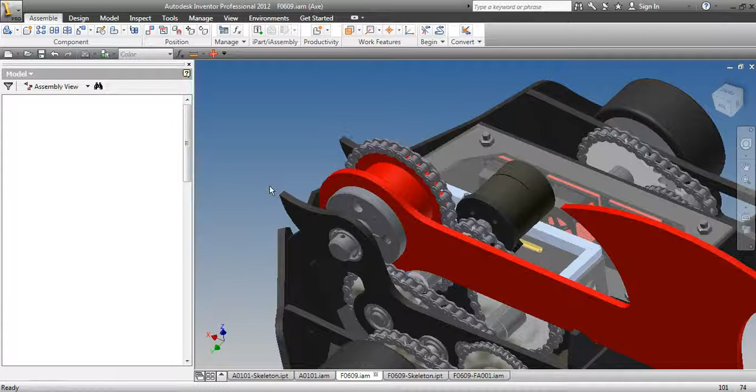I've managed to remove those bottom axles and bottom bearings. Well, I haven't removed them, I've suppressed them, so they're still in the axe, still there in the axes and knives and things. But in the first spinning weapon I'm going to draw up here, they've been suppressed.

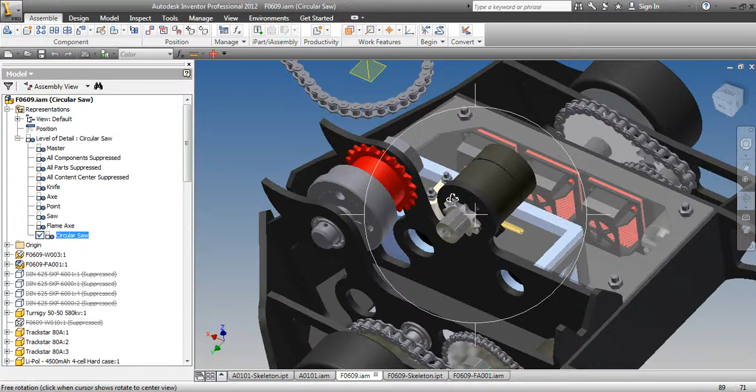I've also put a 20 tooth sprocket on there instead of a 30 tooth, so it's got a smaller sprocket, and we've got a 10 tooth on the weapon. I'm just trying to decide if I should make it 8 or 10 or whatever.

It's not going to be an extremely fast spinning weapon since I'm only going to run it on 4 cells. But I also want a bit of torque in there because I want to put the swing hammer on, and the swing hammer would require more torque rather than speed.

But we'll just leave it for the moment because I need to put the chain on there and make sure the chain distances are correct. I've set up this chain, so I just need to modify it. If I just open it... come on, open. Yeah, open the chain model. You edit the spreadsheet.

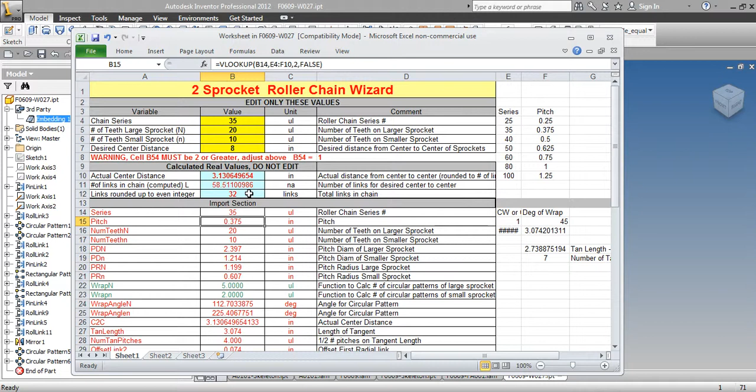I have a rough estimate of how far I want between the two sprockets - I've got a 20 tooth and a 10 tooth. It's saying at the moment it's around 3.9 inches. I want it to be about 3 inches, so we'll try 34... no, 32, that's a bit closer. Yeah, we'll leave it 32 teeth - 32 links, what am I saying tooth for - 32 links of chain. We'll save that.

Update that. There we go, that's what the chain would look like. Remember the part number, weapon part 27.

So now I need to change it so the distance between the weapon and the motor are now the same length as that. So if we go to the skeleton, drive in the chain - where are you, chain, number 27 - here we go, center to center distance, there it is, okay, nope, what's the center to centers, which one is it, where's 27... one, two, okay.

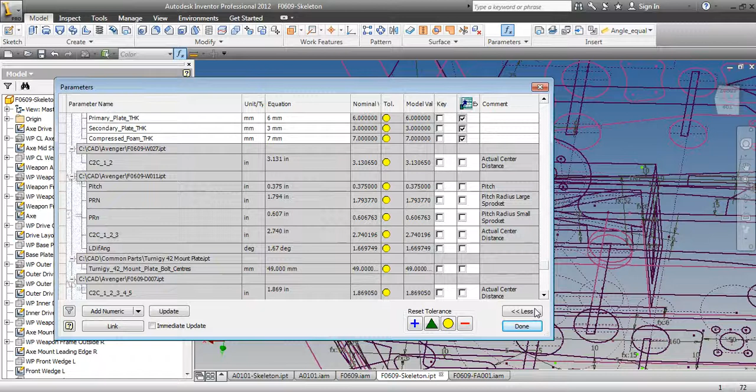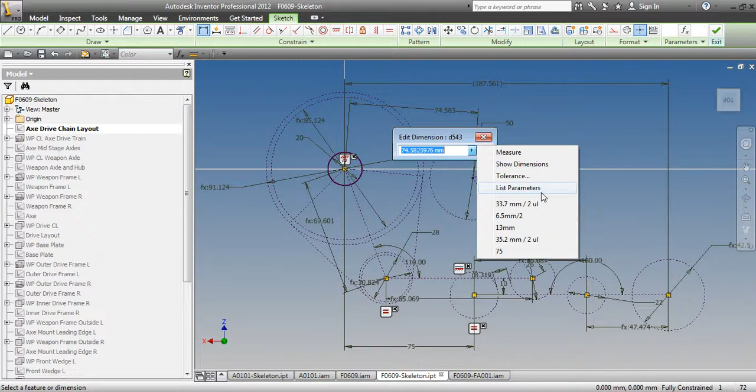So if I go back to the main layout, delete the angle for what the motor's sitting at, put in a dimension between it - the center of the weapon axle, the center of the motor, aligned - select the C2C_1_2 parameter, here it is.

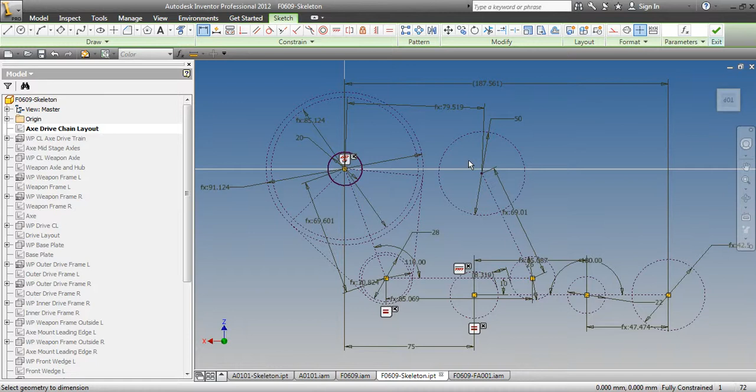So now the motor sits the correct distance for the gear reduction - for the axes, a 3-stage gear reduction, and single stage for the spinner. That way I can remove sprockets and add sprockets back in to change gear reductions. So, goody.

Just save that, back to the main model, update it. Motor moves a little bit. So now we're just constraining this chain.

The chain is on the center line of the weapon sprocket. So where's the center plane of the weapon sprocket? I don't know, I'm looking at the right part, just can't see it. We'll go wireframe so I can see it. There we go, that one. So it's on the center line of that plane and that plane. There we go, apply, done. Turn it back on to shaded.

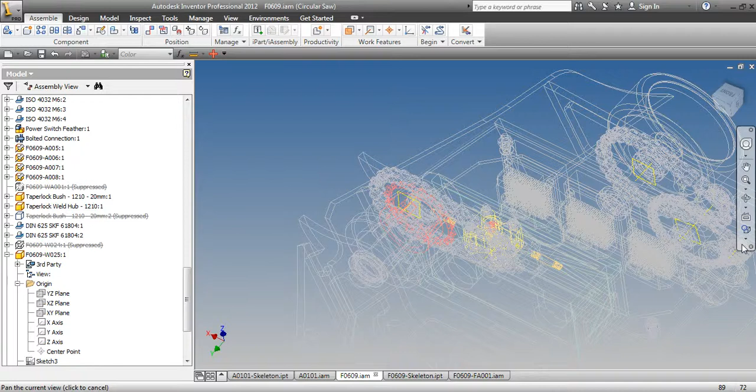Geez, my mouse is really messing me up at the moment. Oh, center line of that axle, center line of motor, and there's the center, I want that. Really need to pull my mouse apart and clean it. And the center line of that and the center line of that. There we go, happy.

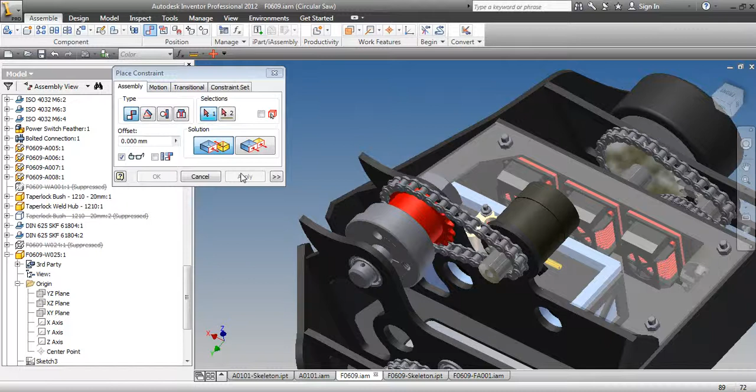So that's the weapon drive for a spinner - if we use the same robot to drive a spinner, that's what it would look like. Now we just need to draw a disc.

Although I need to open up the front a bit more, but I want to see where the disc sits first and how big a disc we can have. So I'll just quickly draw a disc in the skeleton model - where are you?

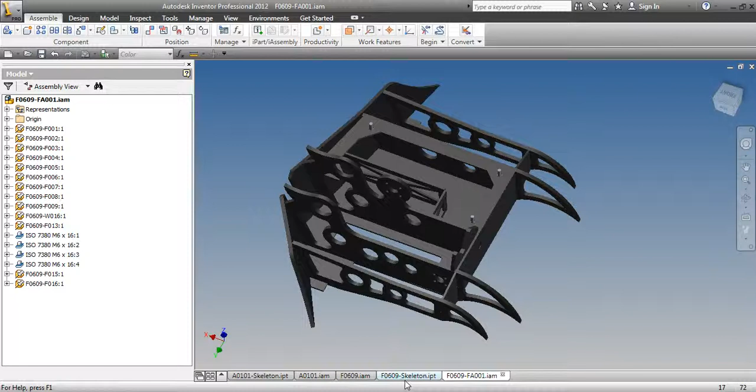The axe sitting on the center line of the robot, if I get the right center plane - yeah, that one, should already know that - and draw a disc on it. Just hit F7, that doesn't make it any clearer. Anyway.

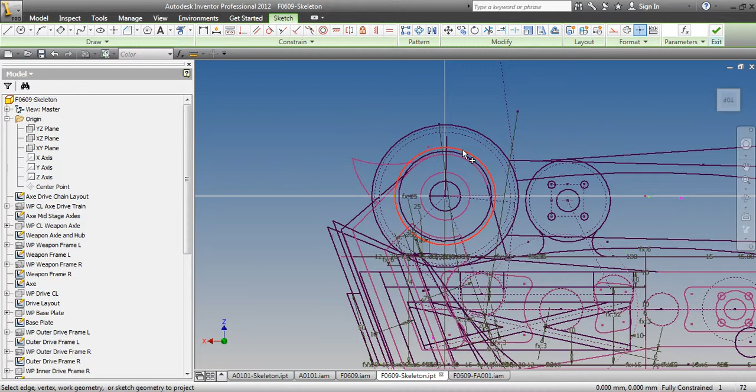So the disc has the same bore as the axis, so that's the bore of the axe. Is that the bore of the axe? Oh, I've got two there. Which one's the bore of the axe?

No, it's just been tricky. No, we'll leave it like that. I've got two circles there, I don't know why. Obviously I was drawing something and forgot what I was doing.

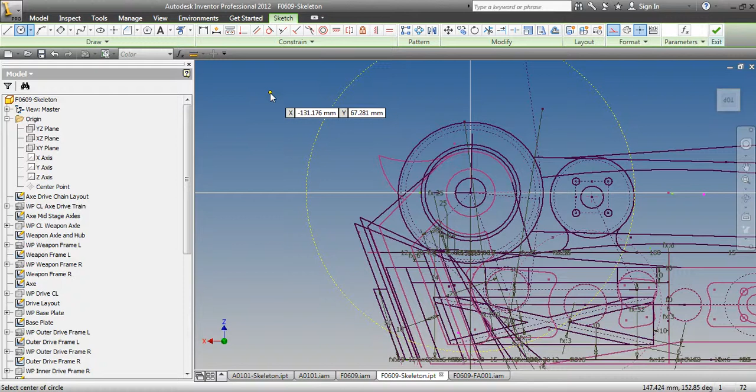We've got to figure out how big a disc we need, so we'll draw in a construction circle. The disc needs clearance between the bottom of the robot. If we go 220, it's not a very big disc, and it's not very much clearance at the bottom there. It does stick out the front.

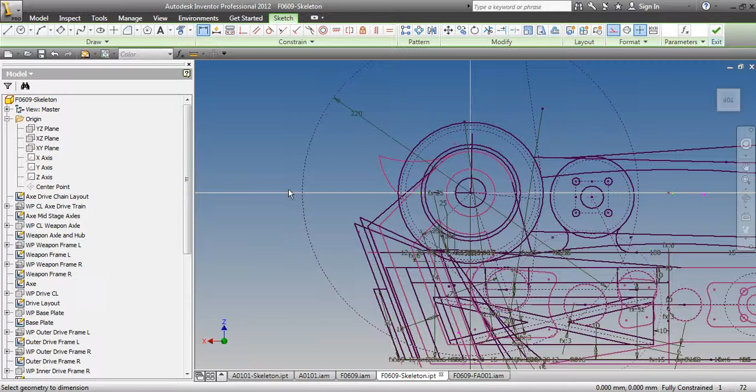Okay, now I'll do my usual sawtooth drawing. I'll draw it up the top. Oh, this mouse is annoying. Why is this mouse not liking me all of a sudden?

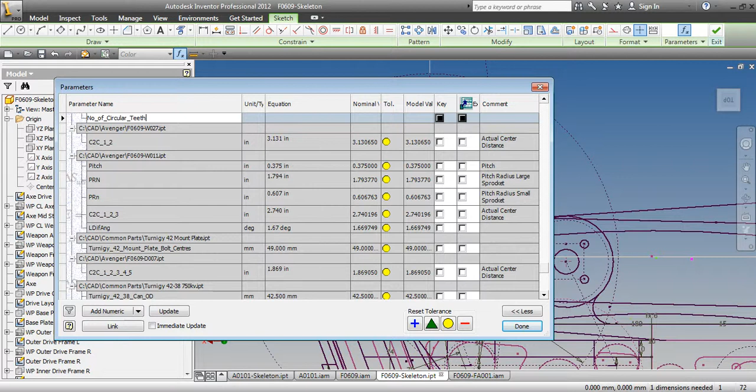Add numeric, number of circular saw teeth. So I've got the straight saw as well. We'll make that a unitless dimension and put 8 teeth on him.

So the angle between the teeth is 360 divided by the number of teeth. Come on, click on the right thing. Number of teeth. There we go.

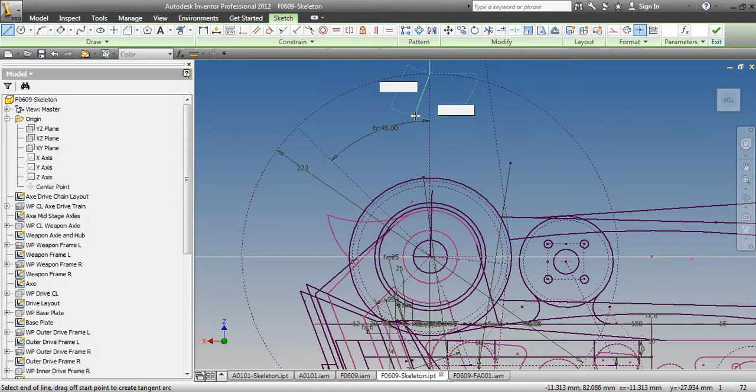And we'll draw in the shape, and there's a tooth, 10-degree angle on the tooth. Draw one over on the second one just so we can get our arcs right - same angle, same length.

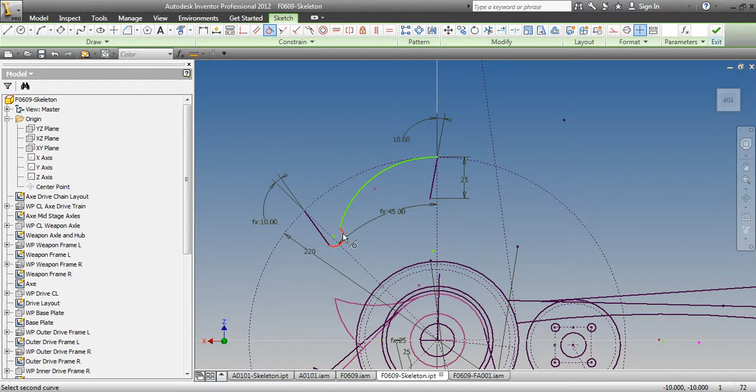We'll change the length of the teeth and make it 25 deep for the moment, just to see what it looks like. Draw an arc from there to there-ish, and a little arc to finish off the bottom. Make them all tangential to each other. Beautiful. And we'll make this one tangential to the arc of the disc.

It's a bit aggressive. And we'll just put a little arc in here to finish him off, tangential to the tooth. Yes, I know, and it's equal to the one over here.

And we will split this one on that line so that Inventor doesn't get confused. So now that one's actually 2 arcs. And we'll put a dimension on this bottom one, make it about 6.

And we'll make this one 60. Oh, okay, that's why - delete that. That point there and that point there aren't equal. I was wondering why I had the dimension up. There we go, I didn't actually need a dimension for that.

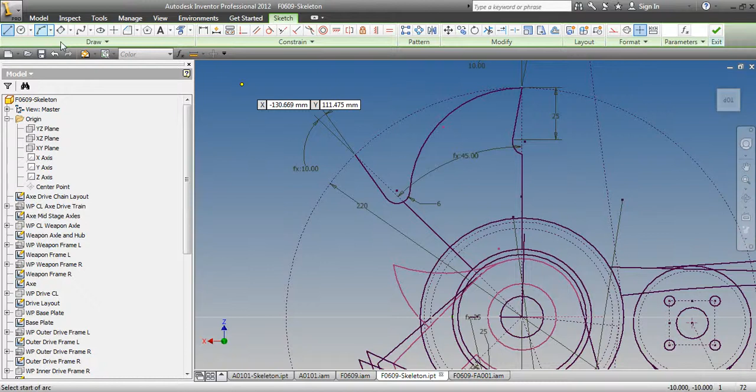Yes, I'm already saved. I'll just finish off the shape, and there. We'll do a little arc down the bottom just to be safe. Alright, click - stupid mouse, okay, done.

Finish sketch, save. Oops, renamed that to be circular saw. Yeah, now we'll save again. Done.

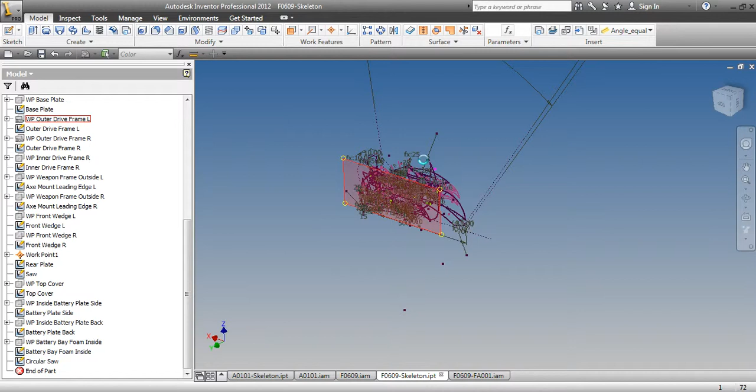New drawing, new part. Yeah, stop beeping at me. Open the correct skeleton - the wrong skeleton here. That's the right skeleton, there we are.

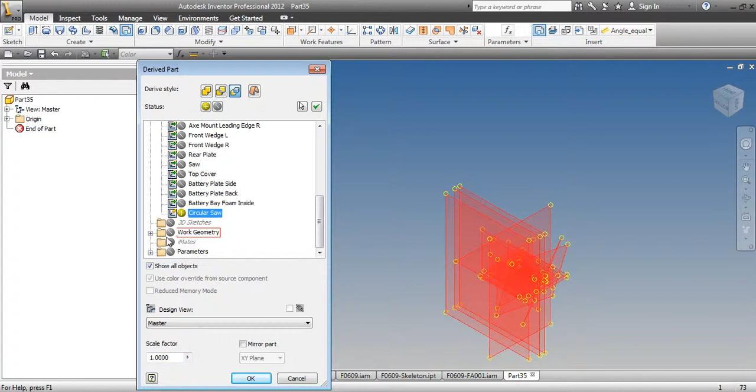And we want the circular saw drawing. We want the plate thickness parameter and the number of teeth. Done.

Extruding out - no, not that. No, you're not listening to me, computer. Stupid Inventor. There you go, primary plate thickness, about the center.

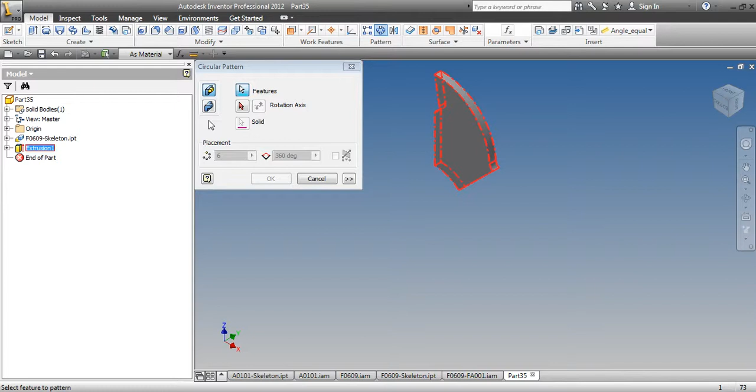And pattern it around the same number of teeth. Done, perfect. Looks a bit aggressive actually, maybe those teeth are too deep.

Make the teeth less deep - where is it, over here. Make them only 20mm. Update.

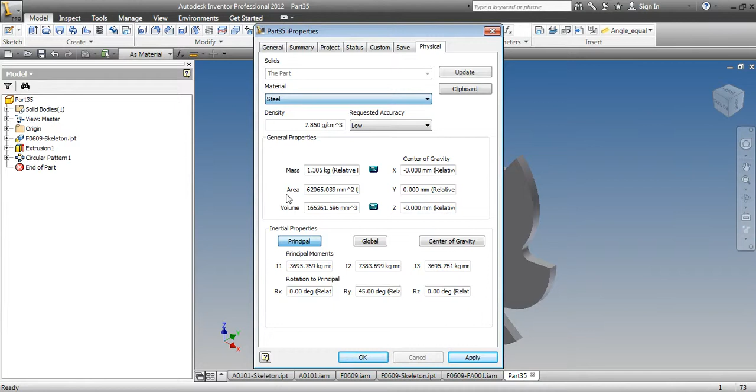Change to steel. 1.3 kilos, so it actually weighs almost the same as an axe. But we've got a lot less sprockets, so we can actually make it heavier - I don't know how. It's gonna mean a bigger disc.

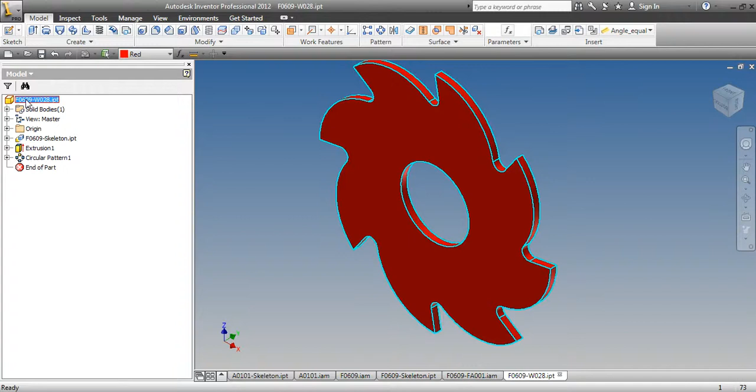There we go, make it red the same as the axles and save the part as part number 28. Save, okay. Why am I saving it twice? Copy into the assembly, paste it in.

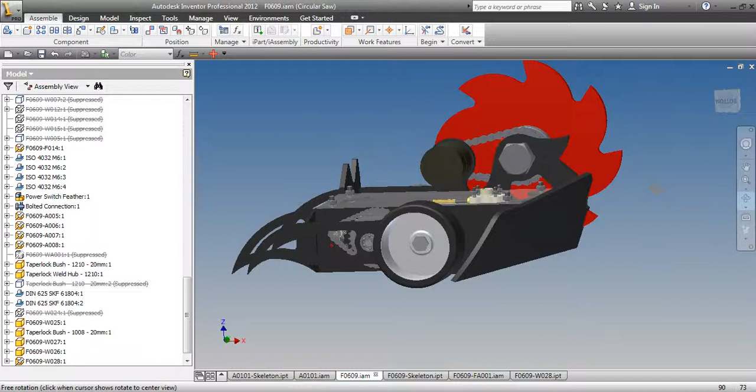Put it onto zeros, apply, ground it, apply. And that's what Avenger would look like with a disc. I think it looks alright, probably needs to sit forward a little bit more.

And I definitely need to open up this front groove, needs to go right down to the bottom from the looks of it. Other than that, it actually looks almost decent, doable. Yeah, I kind of like it.

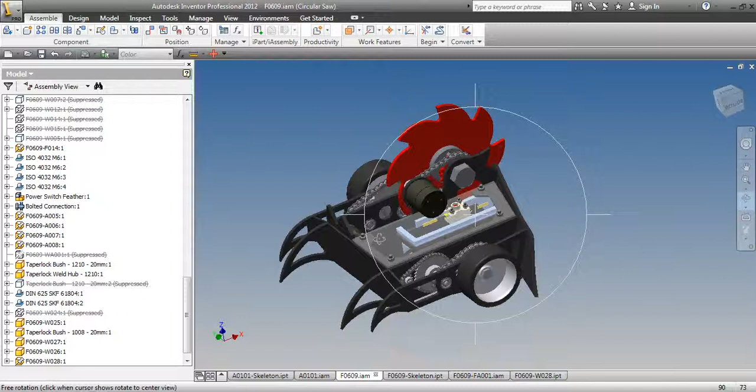And just save. Okay, we can have a disc, or an axe. Suppress, or an axe - there we go. Save.

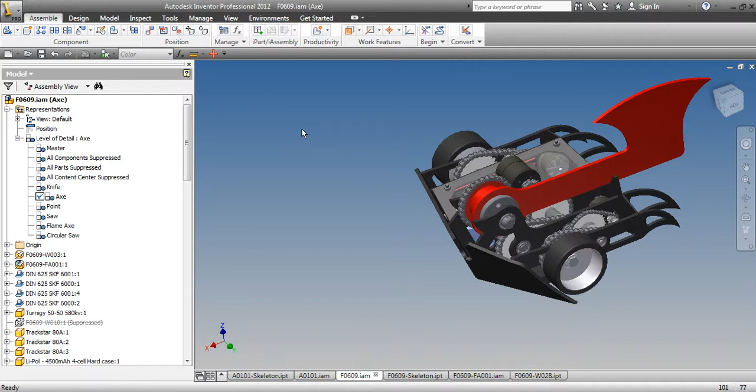Two different types of weapons onto the one robot. Oh, what am I doing? There we go, this one - disc. And that'll actually be lighter.

So next time I've got to open it up and move it around a little bit so the disc sits in there a bit better. Alright, save, done.